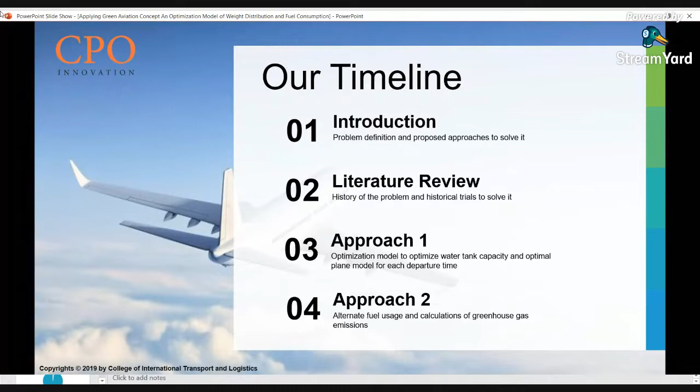So let's start this off with a simple introduction. The aviation sector is one of the largest fields of transport. It has been growing rapidly through the past years. In this report released by IATA last June, you can see that in 2004, around 2,000 million passengers were transported globally using airplanes. Yet last June, only in the mid-year, around 4,500 million passengers were already transported using airplanes. So this field is growing at a very, very high pace.

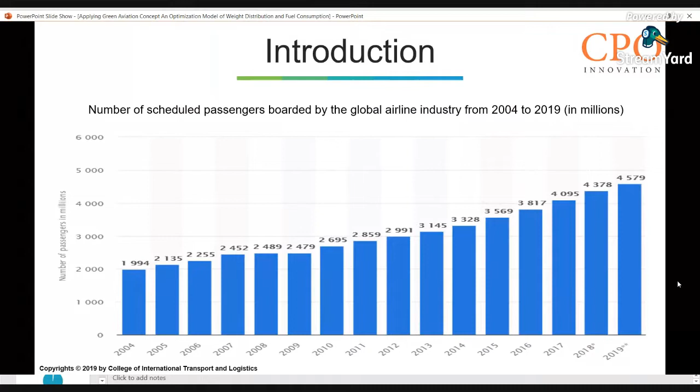But as this sector grows in size, the amount of CO2 emissions and the amount of problems that it faces grows up with it. In this graph released by C-Roads - an application released by the United Nations and different research centers and universities that measures the amount of CO2 emissions, peak year, current emissions, and tries to predict the amount of emissions each year throughout the coming 80 to 100 years - according to these reports, the amount of CO2 emissions is just going to get its peak by 2100, which is very, very unacceptable.

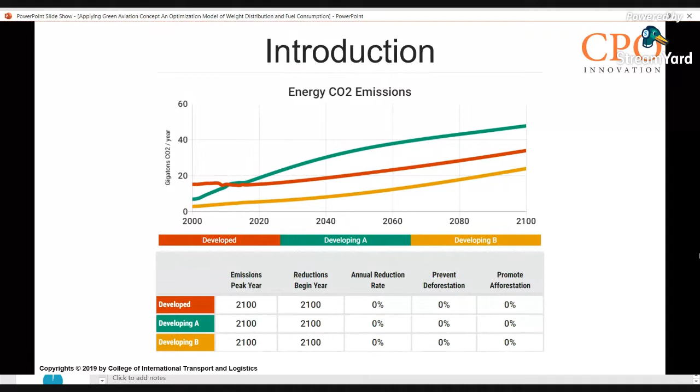It's contradicting with our SDGs, with our national plans, so we have to do extra efforts within this scope to have a better future for us and for our children. According to the World Resources Institute, the aviation sector is responsible for about 2% of global greenhouse gas emissions. The percentage is increasing at a very high pace, just as the size of this sector, and there is limited progress in reducing it. So here we are, and that's why we are discussing this specific topic today.

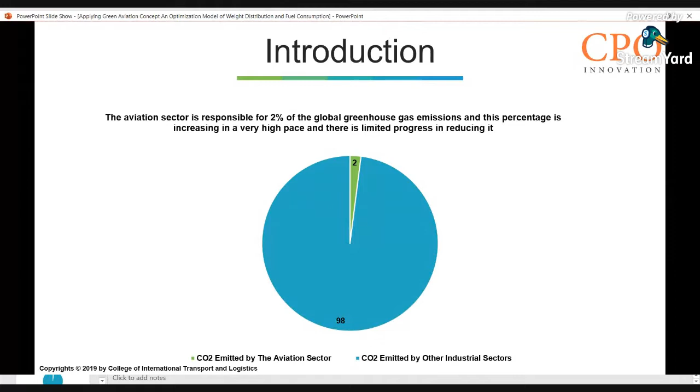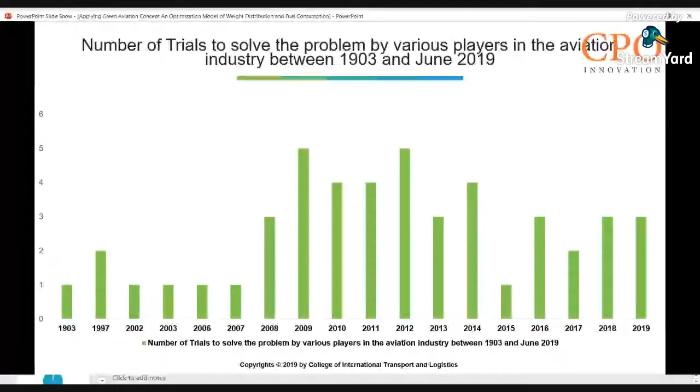Throughout the research, we collected a number of trials to solve the problems by various players in the aviation industry, between the start point of the aviation industry in 1903 with the Wright brothers, and June 2019. So our timeline starts with 1903, the Wright brothers with their successful first ever sustained human flight. This was the launching point for this huge sector of transportation.

Then in 1997, the Kyoto Protocol was established in order to reduce the amount of greenhouse gas emissions globally, with cooperation with national governments and global entities, but it suspended the aviation sector to be managed by the International Civil Aviation Organization, the ICAO.

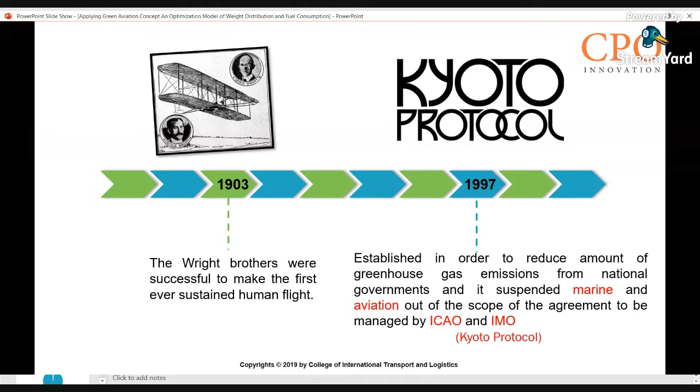In 2003, the United States government launched the Vision 100 Century of Aviation Reauthorization, which aimed at reducing the overall emissions of airports by providing financial support to these airports and to the national airlines, and by convincing sponsors to finance the whole project as well.

So they are trying to get the different players in the aviation sector more keen and excited on investing their money in replacing the old planes with new modern planes with better engines, fewer emissions, and to invest more in optimizing their day-to-day operations.

In 2010, the base point of our research was planted by Imperial College London, as they introduced continuous descent operations. CDO is not a technology, it's a technique taught to pilots to teach them the optimal way to take off and land using the optimal altitude, speed, and angle, so that we can minimize the amount of fuel burned and the amount of CO2 and other gases emitted.

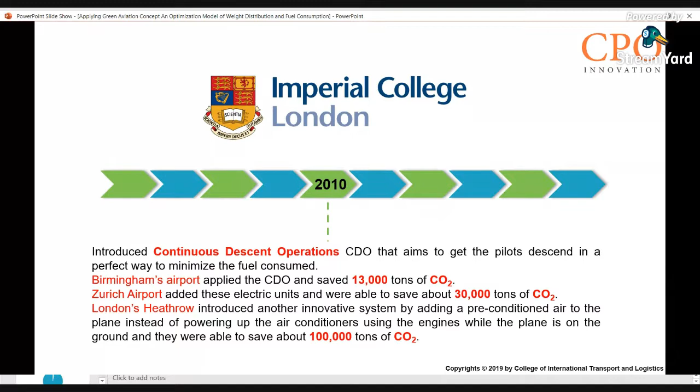Also in 2012, the Indian researchers Devinder Kumar and Anshul Sharma continued this research by developing an optimization model regarding the effect of takeoff, landing, and aviation altitude, and the speed and cruise mode on the fuel burned, and relatively on the amount of CO2 emitted because of this fuel burned.

In 2019, the Chinese researchers Ziping Zhu and John Pei went the extra mile. They defined a new approach to reduce the amount of fuel consumed by affecting many flight factors, such as weight, which we handled in our research, flight altitude, and velocity factors, and their strong relation to fuel consumption and relatively to the amount of greenhouse gas emissions.

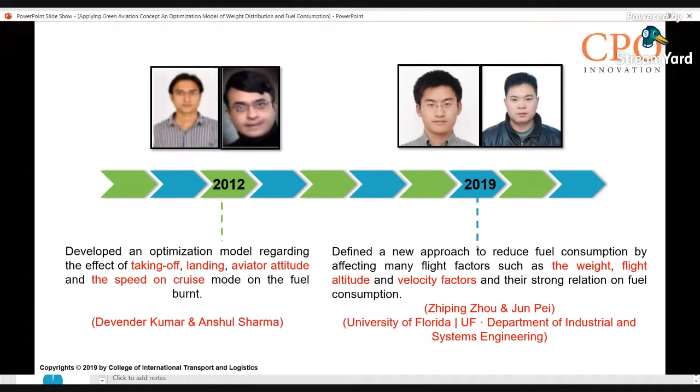So we have the SDGs, the Sustainable Development Goals of the United Nations. We are supposed to have 20% fewer greenhouse gas emissions from the aviation sector by 2020, lower than the ratios of 2013, but we are actually very far away from these ratios.

According to the World Resources Institute, there is insufficient progress, and most likely we are not going to achieve this goal by 2020. So we still have the chance to achieve it by 2030 or 2050. Here we are trying to propose different solutions and approaches to solve such a major problem that we face globally.

Yet we cannot move on without highlighting the main players in this sector, which are the airline companies. Actually, the airlines were the most active and enthusiastic players who tried a wide variety of solutions to reduce the amount of CO2.

We have various examples such as Qantas Australian Airlines, Japanese Airlines, and Lufthansa Airlines. These three have invested millions of dollars, and they were able to bear the burden of losing millions of dollars because of different trials of using biofuels or different operations, and investing in new planes.

Today, we'll be applying this equation on a real-life case study, which is Egypt Air. Egypt Air is one of the world's pioneer airlines. It's Egypt's national airline, established in May 1932. They are a member of the Star Alliance network, which is the largest airline alliance in the world.

They have a huge number of trips each day, so they will be a perfect example for us to measure our proposed solutions on. Our research plan started with a field visit to Cairo International Airport, specifically to the Egypt Air facilities, to gather all the required data and observe closely all the operations, to select which operations contribute most to the amount of greenhouse gas emissions and which require the most optimization effort.

So we chose a small trip, a short trip between Cairo and Jeddah. It's almost a 2 hour trip, almost 1,215 kilometers, so a very short one. But we selected this trip specifically because it has a huge seasonality factor. Egypt Air flies about 2,365 trips annually between Cairo and Jeddah, so this is a huge number of trips each year.

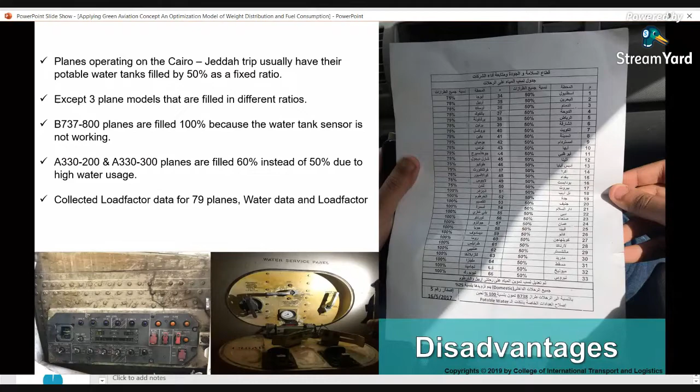So we were able, through the month, to collect data for around 79 planes with different data types. Let me zoom in here. Okay, give me a moment.

So we were able to gather the departure time, the plane model, the actual water tank filled capacities, the maximum water tank capacities, the amount of used water, the amount of unused water in liters, the maximum passenger capacity, and the actual capacity for each plane, the consumption per passenger, the extra consumed fuel according to the amount of unused water, the weight of the unused water according to the equation mentioned before, the cost of this extra unused fuel consumed per hour and per trip, and the amount of CO2 emissions emitted because of this extra burned fuel.

So mainly that was the data we collected throughout the months for about 80 planes. Then we started formulating our math model. First, we defined our objective function: to minimize the cost of extra burned fuel because of the amount of unused water, using the term Xij CASK. Let us not rush this and discuss it in more detail.

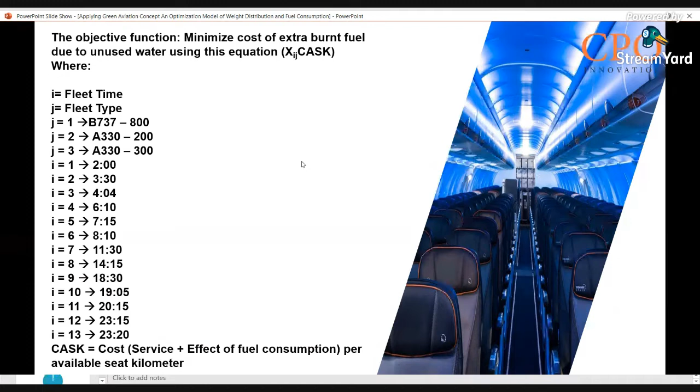So after defining our objective function, we started mentioning our constraints. The first constraint, for example, is x11 plus x12 plus x13 equal 1. This means the first plane at the first departure time plus the first plane at the second departure time plus the first plane at the third departure time equals 1. So only one plane can take off at the first departure time. The same thing applies to the 13 constraints.

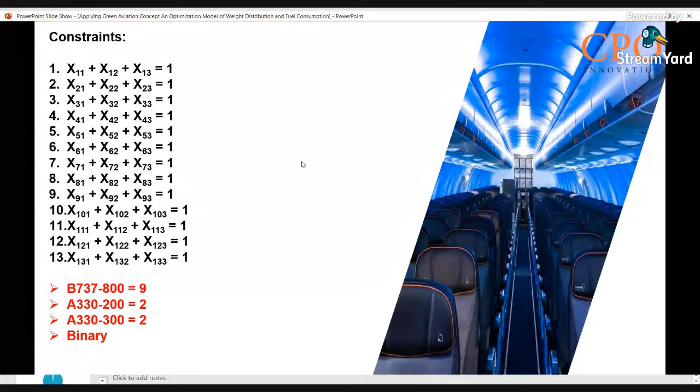Also, Egypt Air has limitations regarding the number of planes: there are 9 Boeing planes, 2 Airbus 200 planes, and 2 Airbus 300 planes. And for sure, our math model should be binary, the results should be binary.

So here we can discuss the CASK. Getting back to this term, the CASK is the cost of available seat kilometer. It's the whole complete cost related to the passenger sitting on the plane for each seat moving for 1 kilometer. That's the broad definition of the CASK.

Here in this research, we are measuring specific costs. We're holding everything constant, and we are defining the CASK as the cost of extra burned fuel because of the amount of unused water for each seat per kilometer. We calculated the CASK, divided it by the maximum number of passengers, the plane capacity, divided by the number of kilometers, which is about 1,215 kilometers. Then we multiplied it with the actual number of passengers by the number of kilometers.

So we have our objective function. Let us take, for example, the first term. The X11 CASK 1 pax means that the cost of extra burned fuel because of the amount of unused water for each passenger per kilometer on the Boeing 737-800 plane on the first departure time equals a value.

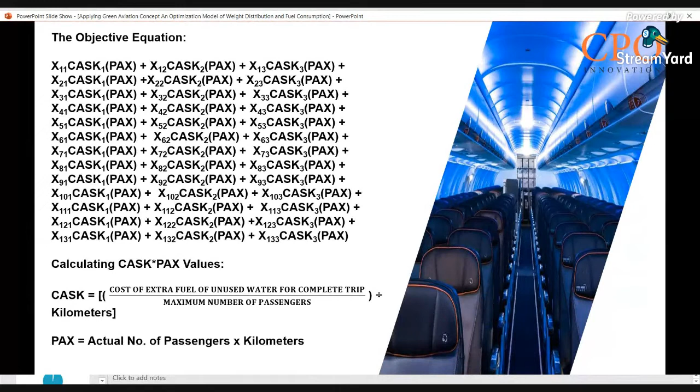We added all this equation, the constraints, the variables, everything to an Excel sheet, and we used the solver to calculate what is the optimal plane to take off on which optimal departure time, so we can minimize the amount of unused water, the amount of consumed water, the amount of fuel burn, and all of that.

The results were as follows. Let us take the first Airbus 330-300 plane. This result means that on the first departure time, it's optimal to fly the Airbus 330-300 because there is the minimum amount of unused water. So relatively, there is a minimum amount of burnt fuel, and minimum amount of greenhouse gas emissions.

The same thing applies to the 13 number of departure times. Now we have the optimal planes and the optimal departure times. Now we have to optimize the amount of actual water tank fill for each plane.

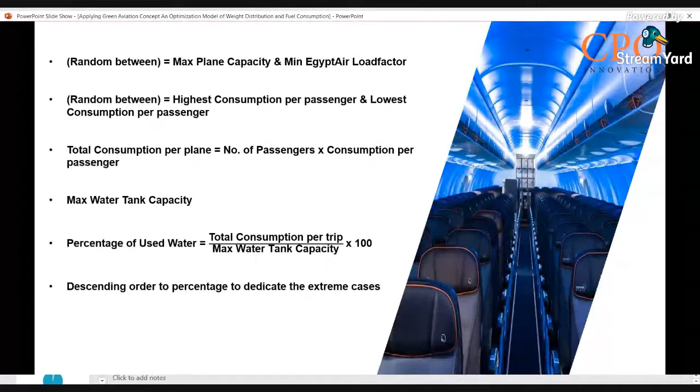So we start using simulation models. We use the Monte Carlo simulation models. Monte Carlo is a simulation model that mainly focuses on random numbers, so our equations were built upon random numbers. So our model was built as you can see here.

Okay, so here is the maximum water tank capacity. Here is the consumption per passenger. Here are random numbers between the highest consumption per passenger and the lowest from the data we gathered.

Here is the number of passengers, also random numbers between the maximum capacity of the plane and the minimum accepted load factor of Egypt Air, which, as I remember, was about 87%. Here is the total consumption, which is the number of passengers multiplied by consumption per passenger.

Then we divide the total consumption over the maximum capacity to find the percentage of consumed water, and we rearrange it descendingly to observe the extreme cases where the plane has its maximum passenger capacity and each passenger consumes the maximum consumption per passenger.

We found out that the maximum amount of water consumed was only 25% of the water tank. So we are proposing that water tanks should be filled by 30% of its capacity, leaving 5% as a safety factor in case of extra surge of demand or extra consumption per passenger for unexpected reasons, to keep customers delighted.

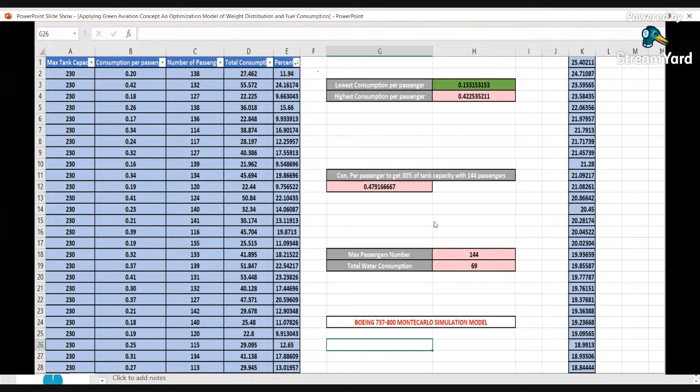So that was a 70% waste when we were filling the planes with 100%, and we are going to see the results of this approach right now.

So on the left side, we can see the Egypt Air traditional ratios and the way they operate or apply their daily operations. On the right, you can see our ratios, the results of our approach. Egypt Air used to have around 11 tons and a half of unused water each month. Today, with our approaches, they won't be having that.

They will be having just around 3 tons of unused water. The cost of extra burnt fuel because of the unused water, they used to pay around $26,000. Today, they only have to pay about $7,000, which is much less. As for the emissions, which is the main factor, Egypt Air used to emit each month from this short trip around 20 tons of CO2. Now they emit around 7 tons only for this trip.

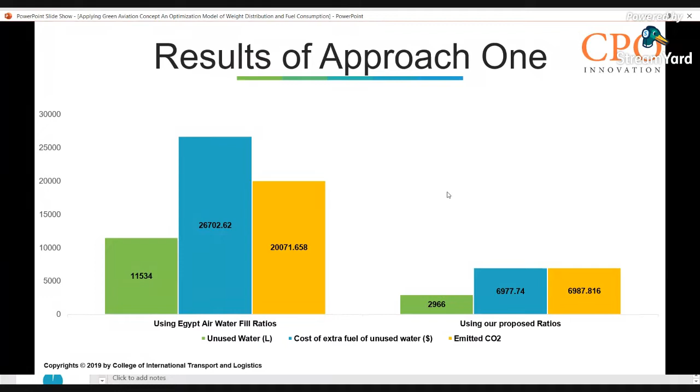So now we are going to move on to our second approach, which is the usage of biofuel, and is it effective enough? Is it worth it to invest my money in purchasing biofuels and making trials using biofuels? Let us start with a general discussion of the types of biofuels.

There are two different generations of biofuel. The first generation is the organic source generation, most likely coming from sugar, starch, and vegetable oil. They have an organic nature, so they have a huge impact on food supply, so they are not very preferred to be used globally. We moved on and started looking at the second generation, which comes from different sources like green algae, paper waste, and wood, and doesn't have a high impact on food supply, so it's a much better solution than the first generation.

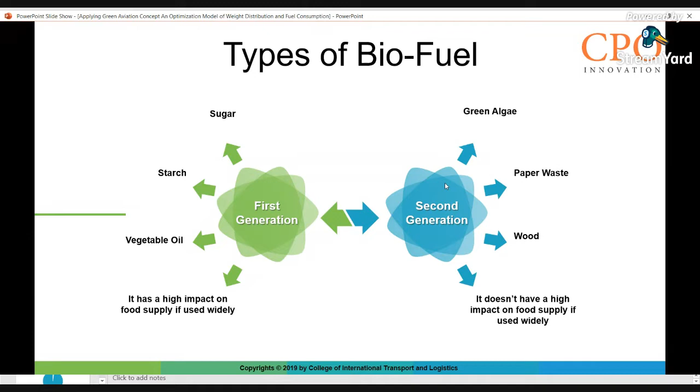So why is it better to use biofuel? Is it really worth it? Each ton of conventional diesel emits around 2.64 tons of CO2 each hour. But for the biodiesel, only 0.396 tons of CO2 are emitted each hour. So there is a huge difference between these two ratios regarding CO2 emissions.

As for the cost, which most likely we all give the highest weight in considering our investments, the diesel liter costs around $2. The biodiesel liter costs around $0.8, so it's around 60% cheaper. Here is the important point: the diesel, when used 100% on the plane engine, doesn't damage the plane filters or cause any harm. But the biodiesel, if used 100%, damages the plane engine filters very badly.

But why is that? The biodiesel has a very high pour point and cloud point. So at very low temperatures, when the plane is at high altitudes, the biodiesel viscosity starts to increase. It's no longer pumpable, it cannot be pumped in the engine, so it affects the flight status. Also, it starts creating a wax-type material around the engine filters that damages the filters badly. So it's very harmful to the plane if you use 100%.

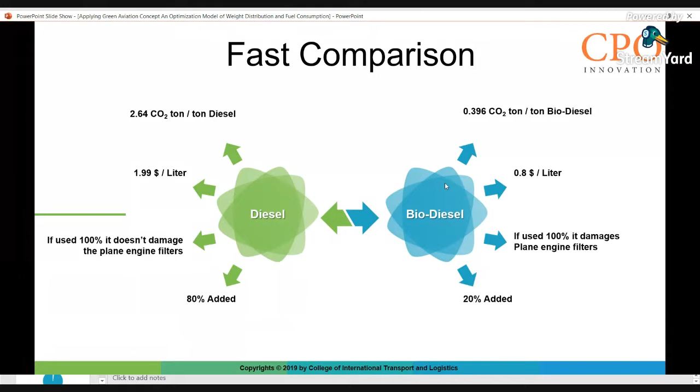Throughout observing the different trials made by different airlines, we found out that the perfect ratio to be used for biofuel is a mix of 80% conventional fuel with 20% biofuel. So now we can save money, save a lot of emissions, and still have our plane very safe with no harm to its engine filters. So what are the characteristics of the biodiesel mix? It has a cost of $1.75 per liter, which is much lower than the $2 per liter for conventional fuel.

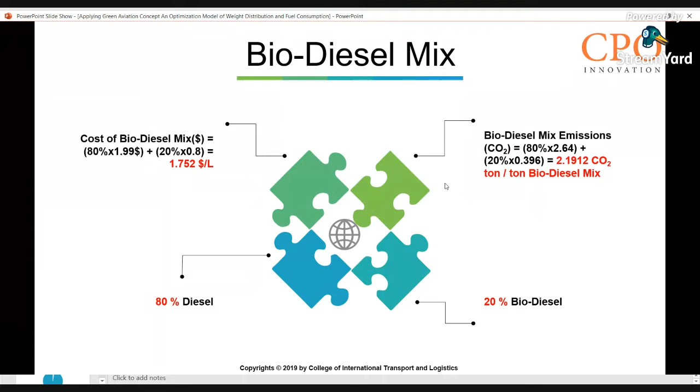The biodiesel mix emits around 2.19 tons of CO2 per ton of biodiesel burned per hour. So the difference is not huge, yet it's effective. It's better than nothing. So we are going to use 80% of diesel with 20% of biodiesel.

Back to our database. Here we can see on observation that the amount of CO2 emitted using conventional diesel alone is huge. Here is the amount of CO2 emitted using biodiesel mix. You can see some real differences between the numbers, at least 50 kilograms or more each hour. So if we added it as an accumulative throughout all trips, we can get some fascinating numbers at the end of the year.

So let's move on to the approach two results. Here is the total amount of emissions using conventional diesel and biodiesel mix. While using conventional fuel, we were emitting through one month, in just one short trip, around 20 tons of CO2 each month. Today we emit around 16 tons by just applying the second approach using biofuel. So we already saved around 4 tons of CO2 by just adding 20% of biodiesel to our fuel mix.

So these are the total results of the thesis: the cost of extra fuel burned as a result of unused water. This is mainly cost. You can see that while using conventional fuel only and Egypt Air's standard ratios, Egypt Air was losing around $30,000 each month. Today, while using the biofuel mix and our first approach, Egypt Air only pays waste of around $9,000, which is much less, and it can be decreased even more if more factors were considered and added to the equation.

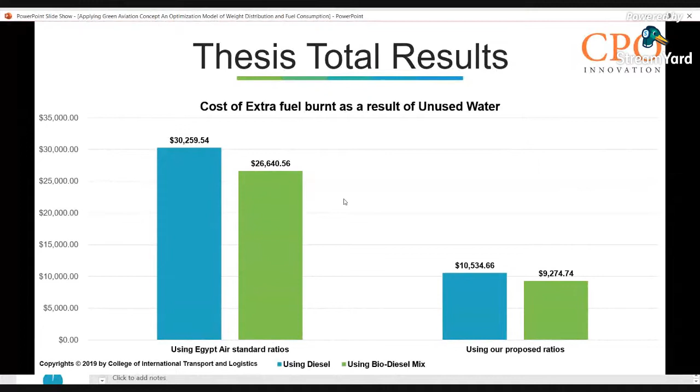That's around 15 tons of CO2 saved using just optimizing two small approaches. Imagine if we optimized all the operations of the airport and applied these to all plane models and all trips. The results would be very, very effective.

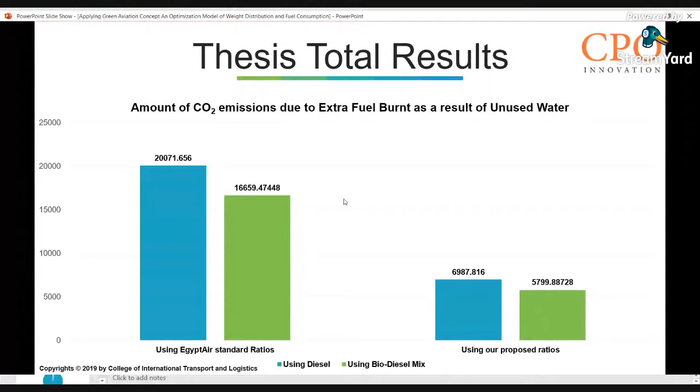So, tomorrow's ideas. Here we are proposing some helpful hints for anyone who is interested and driven to improve and continue the research that was started years ago and has been continued by different entities from different nationalities.

This thesis handled a very short trip between Cairo and Jeddah airport. The trip is just 2 hours and around 1,215 kilometers. So we recommend that further research focus on a longer trip.

And add more variables. You should consider the cargo weight, different plane models, adding different models to the equation. Also add the plane's center of gravity - the CG of the plane is a very important factor that can limit the results of this plane mass model operation.

Also, to be able to monitor and optimize the process in a much more accurate way, a wider scale of time should be collected. Also, a wider number of trips should be added to the equation so the results can be measured much more accurately.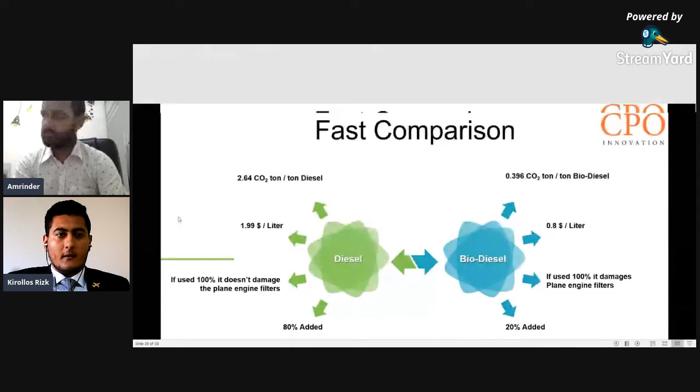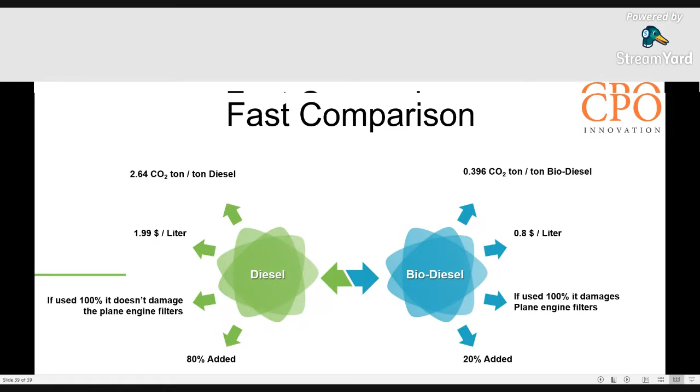Okay, give me a moment. Slide 21, okay. Lord, yeah, I'm with you. I'm sharing my screen, give me a moment. I think it was the graph, if I'm not wrong. So it's the constraint graph, slide 21. Okay, which constraint? Just here? Can I see? I'm checking. Just hold on. Okay, take your time.

Yeah, so it was the slide for the objective function, where it says you minimize the cost. Yes, this is the slide. Okay, so they want to know, can you just explain this slide again once?

Okay, sure. Our objective function was to minimize the cost of extra burned fuel that results from the extra weight, from the amount of unused water on the plane trip. So we created a term called X_IJ_CASK. X is the variable, the value of the cost. The IJ and the CASK are specifications, characteristics of this cost.

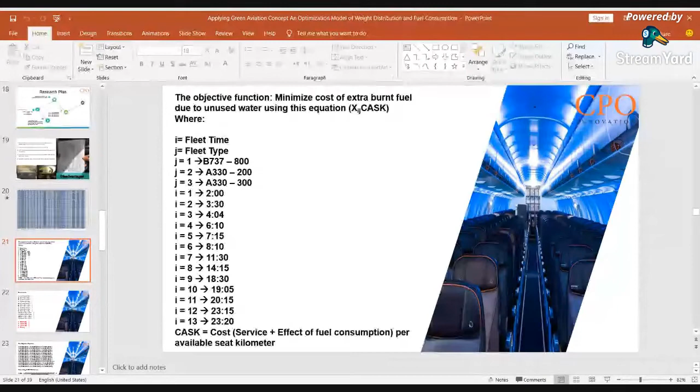All right, perfect, Kirollos. So there's one more question from the audience asking about how information technology is setting a strong foundation for manufacturing in aviation.

I didn't hear the first part of the question, please. All right, let me repeat - it's like how information technology is a foundation in manufacturing in aviation.

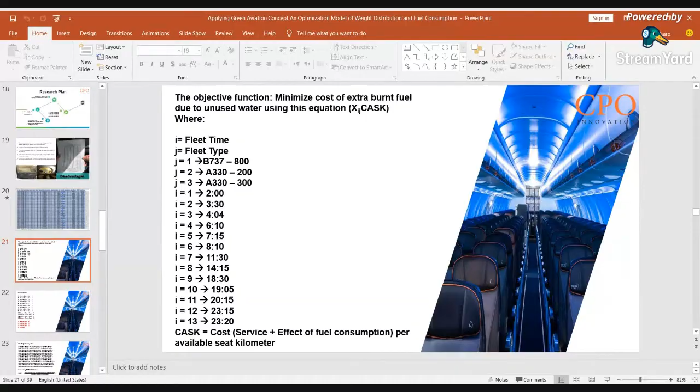Actually, that's a wonderful question. IT has a very important role actually in the green aviation future.

Here is just a small proposed trial. There should be IT systems where, just before the plane departs, you add the number of passengers, and it calculates and predicts the amount of consumption per passenger, so it can predict the optimal amount of water to be filled and the optimal weight distribution in the plane.

This minimizes the extra burned fuel and greenhouse gas emissions on all our trips. There can also be software that optimizes daily operations—loading and unloading, operating time on the ground, departure and landing times. Everything can be optimized using software. It will ease the process a lot and help us get fascinating results from this sector, which has had insufficient progress until now. But I believe it won't stay like that for too long.

Okay. So I hope that I answered your question too.